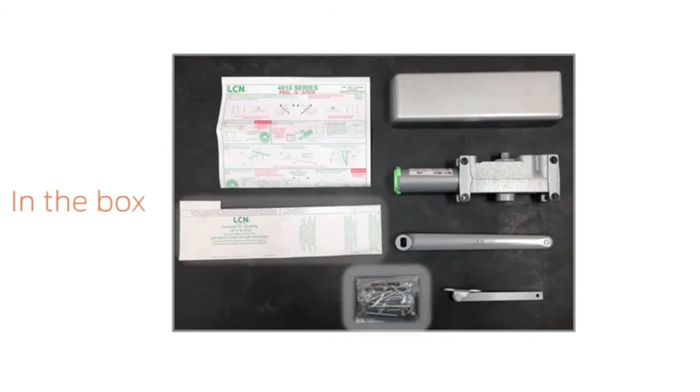These are the tools that you will need. In the box, you will find the cover, closer, regular arm, rod and shoe, screw pack, drill template, and instruction sheet.

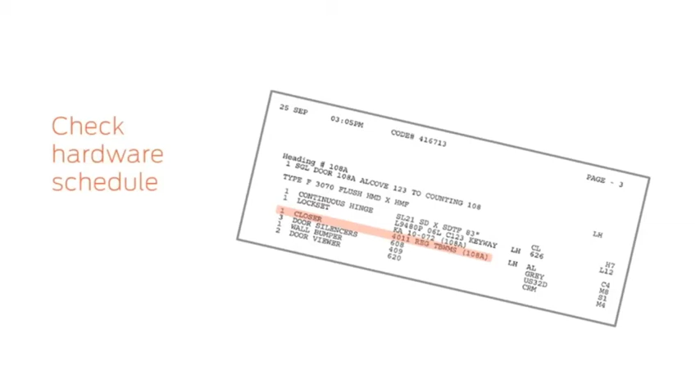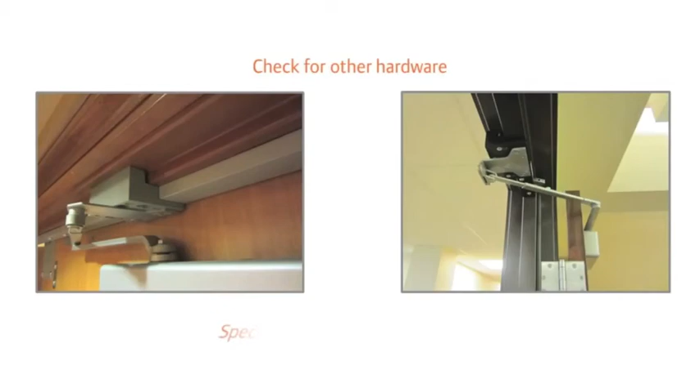If this is a new construction project, check the hardware schedule to confirm you have the correct closer for the opening. Check the opening for other hardware mounted on the top jamb. Items such as a coordinator or overhead holder can affect the installation of the closer, and special templates may be required.

Ensure the door swings freely, fits into the frame without binding, and that any latching hardware engages easily. There should be a 1/8 inch gap on the top and sides between the door and frame.

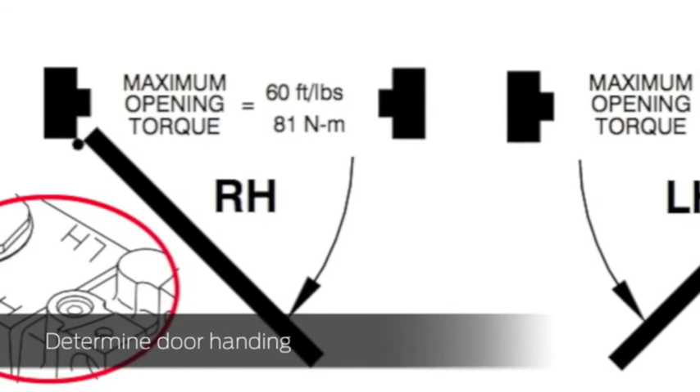First, determine the handing of the door. This chart, found in your installation sheet, can help you. Then, determine how far the door opens. This door opens to 90 degrees. Affix the self-adhesive template to the door, aligning the edge of the template with the hinge and top edges of the door, as shown on the label.

For doors that open from 100 to 140 degrees, place the line on the template along the hinge edge of the door, as shown on the label. For doors with pivots or swing clear hinges, locate the closer and shoe from the pivot point of the door.

Using the center punch, mark the 6 locations to be drilled on the door and frame. Drill 1/8 inch pilot holes through the template at all marked locations. Remove the template from the door.

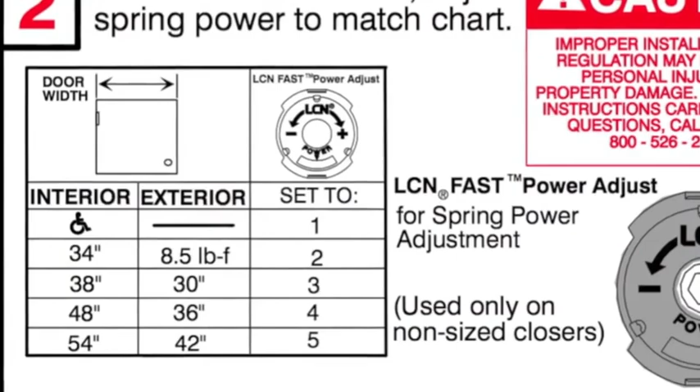The LCN 4011 spring power can be adjusted to provide proper closing force for your door. Please note, an improperly adjusted spring may result in personal or property damage. Using the chart in the installation instructions, determine the appropriate spring power setting based on the door width and the location of the opening. Adjust the spring to the correct number using the 5/32 inch hex wrench. Turn the screw until the proper number appears in the power window.

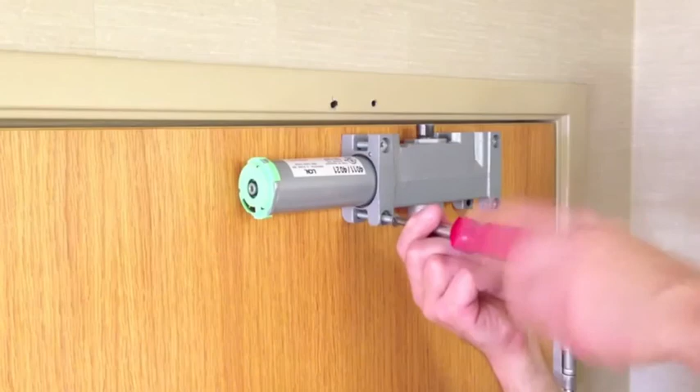Attach the closer to the door using the 4 screws. Self-reaming, self-tapping screws are provided as standard. Depending on your application, your supplier may have also provided wood screws, through bolts, and machine screws. Attach the rod and shoe to the frame using the 2 screws. Be careful not to over-tighten.

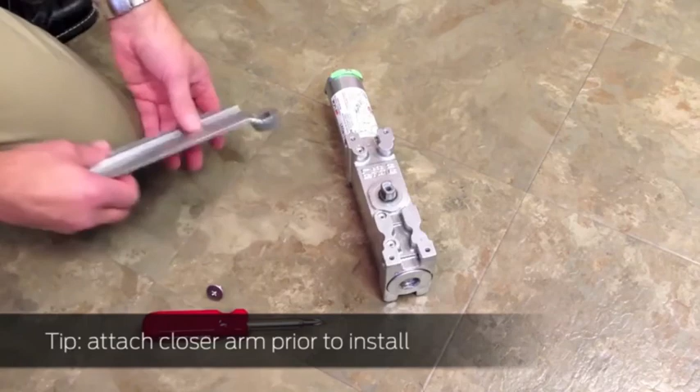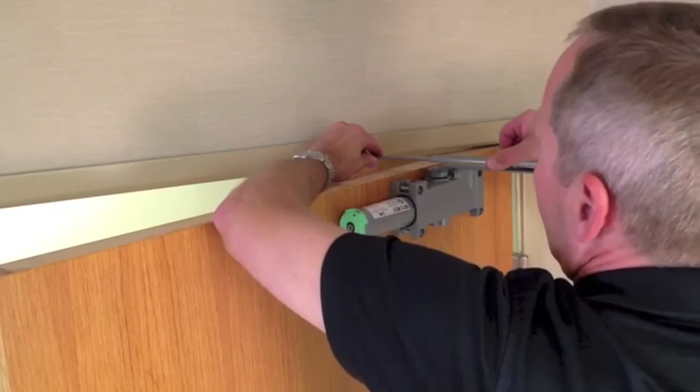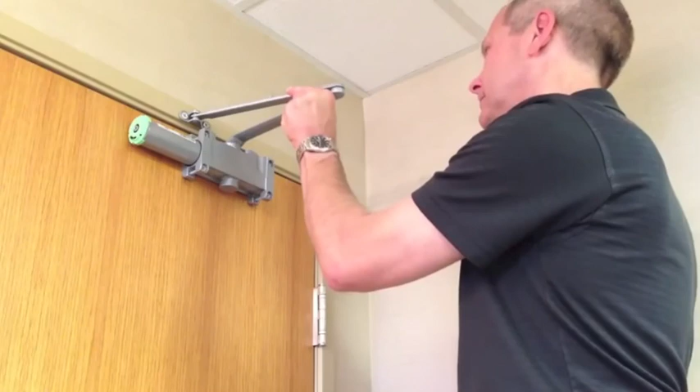Attach the arm to the closer using the fastener provided. The arm may be attached to the closer prior to installing the closer on the door if it is more convenient to do so. With the door open, slide the arm over the rod and begin fastening the arm screw, but do not tighten. With the door closed, position the arm until it is 90 degrees from the face of the door. Then, tighten the arm screw.

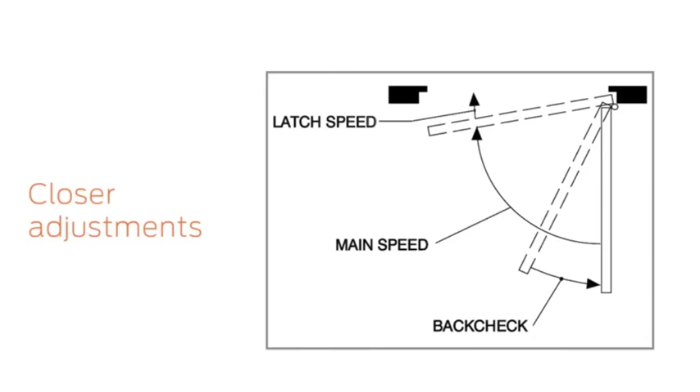Making adjustments to the closer allows you to control the motion of your door. There are 3 hydraulic adjustments that provide optimal door closer operation. The closer comes from the factory adjusted for a typical opening. Your closer may need additional adjustments depending on your installation requirements. To test the result of your adjustment, cycle the door twice.

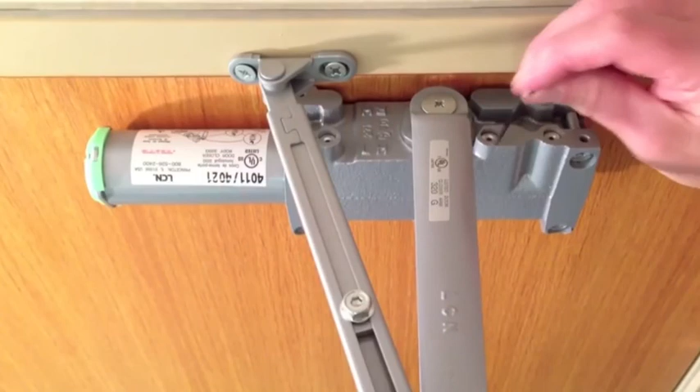Please note, do not back out the adjustment screws too far. If you are close to backing out the screw completely, you should feel increased resistance. Once you feel this resistance, do not back the screw out any further.

Back check is the hydraulic cushioning to slow the door as it opens. This usually starts at 70 degrees. The door will slow down to reduce wear on the door, wall, and hinges. Back check does not serve as a door stop. To adjust it, locate the back check screw, which is the screw farthest from the spring tube. Turn it counterclockwise 1/2 turn.

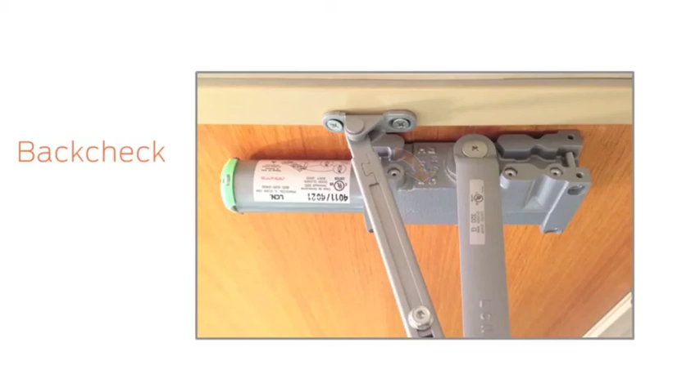Then, open the door to test. If additional cushioning is needed, turn screw 1/4 turn clockwise and retest. If less cushioning is needed, turn screw 1/4 turn counterclockwise and retest.

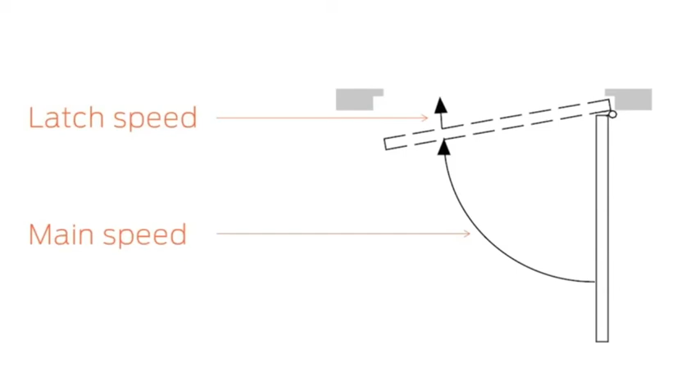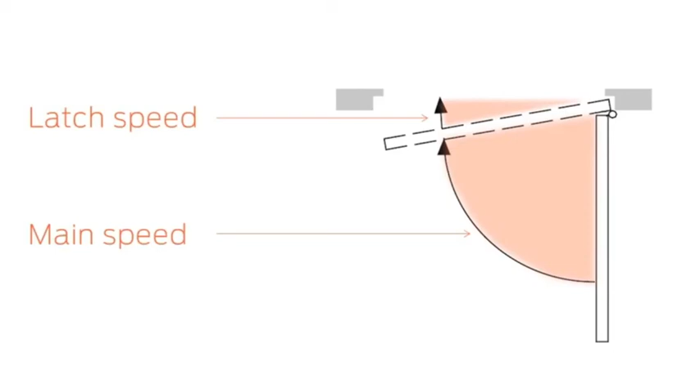The next two hydraulic adjustments are main speed and latch speed. The main speed is the speed at which the door closes from its fully open position to about 20 degrees. The latch speed is the speed at which the door closes during its last 20 degrees of closing. When setting these two closing speed adjustments, remember the Americans with Disabilities Act requires doors to take, at minimum, 3 seconds to close from 70 degrees to within 3 inches of the latch.

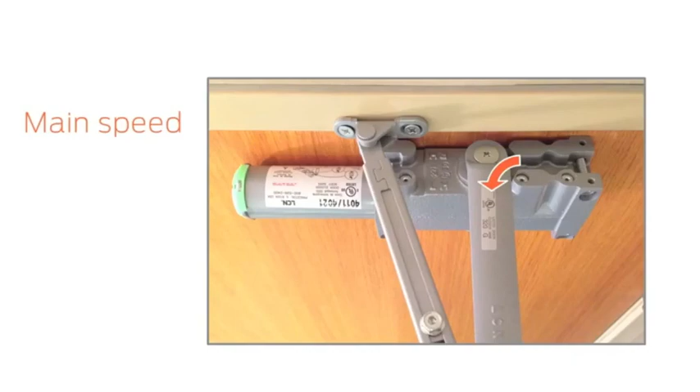The main speed screw is located on the front side closest to the pinion, where the arm is attached to the body. Make an adjustment 1/4 turn at a time, clockwise to decrease speed, counterclockwise to increase speed. Then, open the door all the way and release it to observe the closing speed.

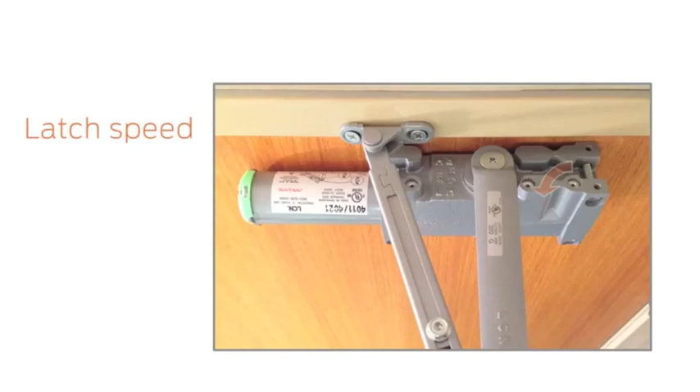Latch speed helps ensure the door latches properly. We recommend only small adjustments to latch speed. The latch speed screw is adjacent to the main speed screw on the front side of the closer. Make an adjustment 1/4 turn at a time, clockwise to decrease speed, counterclockwise to increase speed. Then, open the door all the way and release it to observe the latching speed.

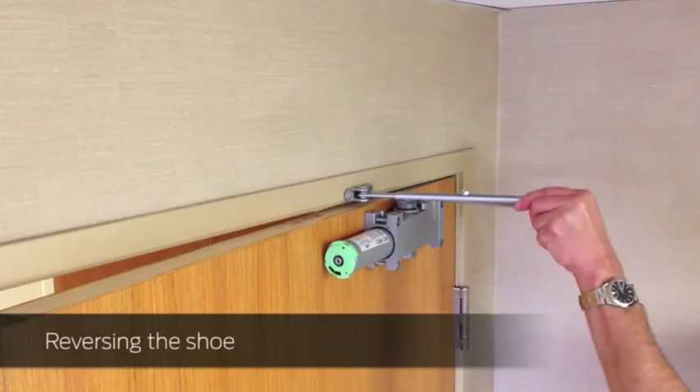If the door does not latch properly after adjusting the latch speed, you can increase the closing force by reversing the shoe. With the door open, hold the arm and loosen the arm screw. Carefully release the arm and disconnect the arm from the rod and shoe.

Rotate the shoe 180 degrees. Reassemble the arm, rod, and shoe. Be sure to position the arm at 90 degrees before tightening the arm screw. If the door is still not latching, increase the spring power for additional closing force. Keep in mind, this will require more force to open the door.

To complete the installation, attach the cover with the 2 fasteners.